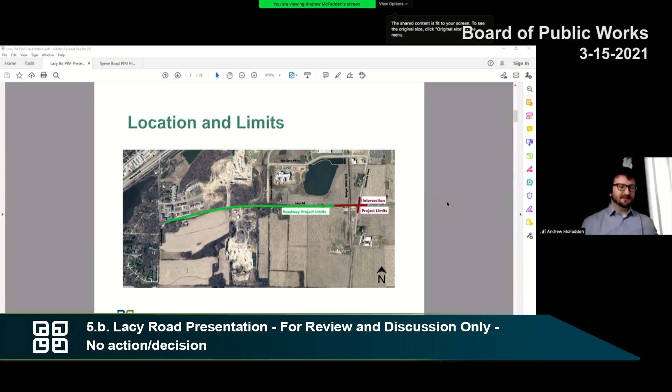Okay, but Bill, I think will jump in. I know he briefed you guys a couple weeks ago, so feel free. We'll kind of tag team this one, but I'll share my screen. I kind of did this for TTC last Thursday. This is kind of a quick run through both the Lacy project PIM and the Syene Road PIM, if I can take those jointly. So we'll do Lacy first and then Syene Road. So just kind of run through the project.

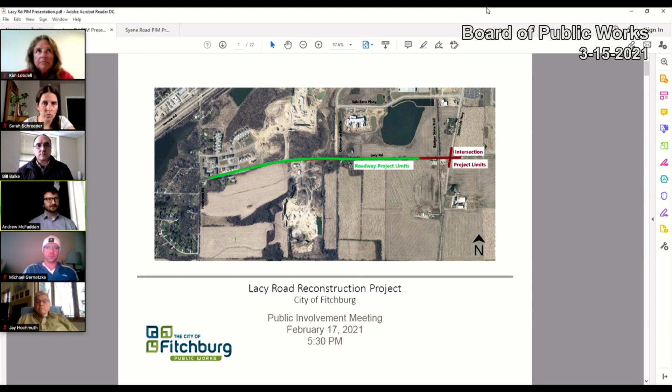As Bill mentioned, there's kind of 3 projects. The Promega frontage, in this section, so because of that, the economies of scale, they're managing the design of this roadway project that goes from roughly 300 feet east of Fitchburg Road to roughly 300 feet west of the Badger State Trail. We did not include Fitchburg Road because of the complicated right-of-way it takes that might come depending upon what that intersection looks like. And then there's an adjacent roadway project, the intersection project limits here at Seminole Highway and Lacy Road, either a roundabout or a signal is what we're looking at there.

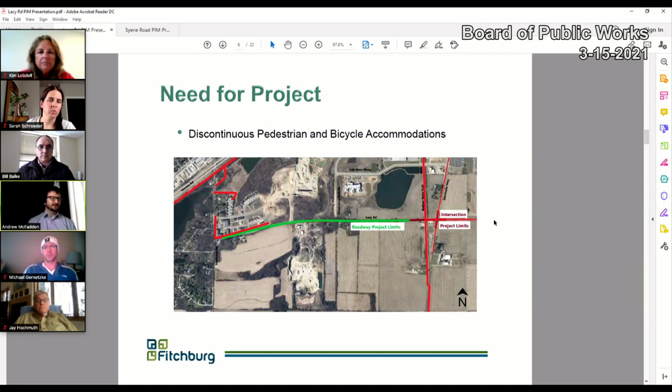So we gave this back on the 17th, and we kind of walked through the limits, the goals, the project, and overview, and then provided a public survey for folks. But I'll just get into the cross section and the actual project design.

So we have two cross sections here, one with and one without medians, depending on where you're at in the corridor. The medians offer a couple benefits: pedestrian refuge islands where there's crossings, some channelization, slower speeds, and channelization for future development by not allowing left turns into and out of different properties along Lacy Road, which can cut down conflicts and make it safer. It also helps make up some of the grades, so instead of a continuous roadway you can have a grade break and keep some of that grade differential in the median.

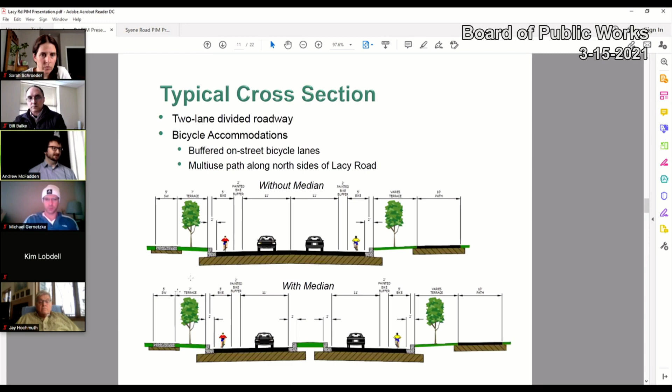So you can see here the various cross-sectional elements. We're looking west, so you have the bike path on the north side, street trees and a terrace, medians, and buffered bike lanes on both sides. The buffer is just painted markings, a 2-foot buffer between the travel lane and the associated bike lane, and then a 5-foot sidewalk on the south side. So roughly speaking, this is what we're looking at.

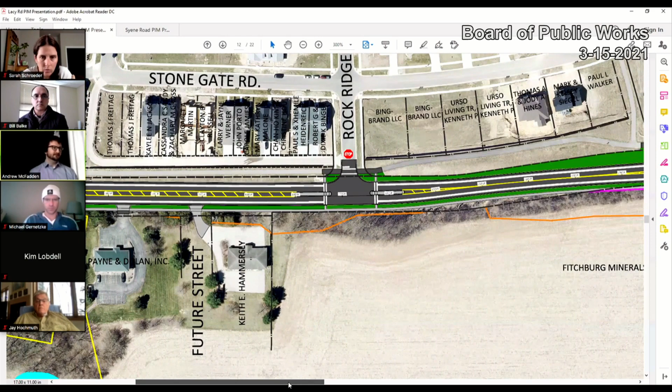So just running through the corridor - as I mentioned, Fitchburg Road is not included in this project, that'll be a 2024 project. We see our first medians here at Rock Ridge for pedestrian refuge islands. No control stopping Lacy, but we will have a side street stop for Rock Ridge as is current. You can see the buffered bike lanes, the medians here, and some driveway access changes.

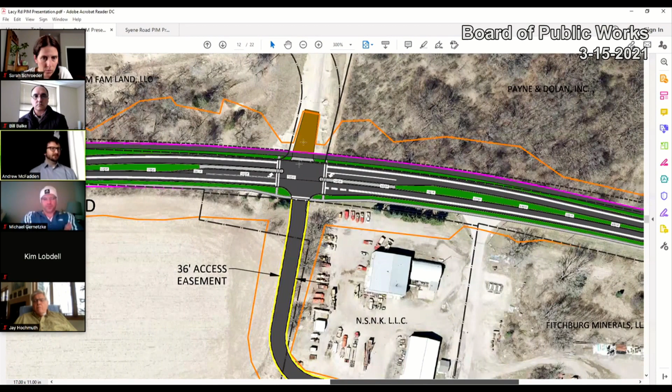A realignment here - the quarry access is a little bit farther east currently, and we'll be realigning it with the quarry access on the north side. Through this section there's a lot of existing trees and a big hill, so we're cutting that grade differential, which is why you see some of these grading limits that reach far out, just to be able to cut into that hill.

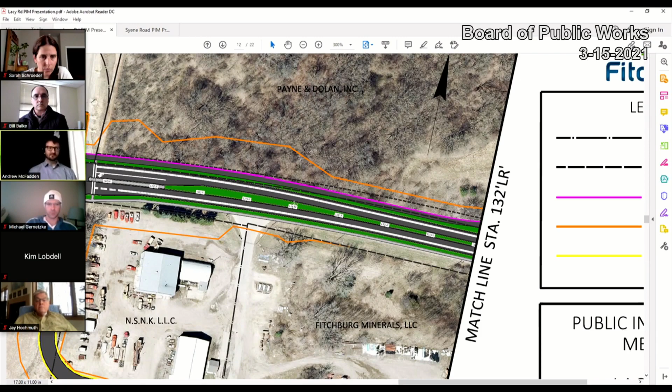We're looking at higher slopes to potentially reduce some of this grading, and I know it was brought up potentially building a wall here. That could be an option, but it's quite cost prohibitive, so we want to hold off from that if at all possible. And as I mentioned, the median does offer some grade break there, so it's not really adding to that grading. So then moving down, I'll continue going east.

I'll note that that's the first big chunk of trees as we move east that we really want to get assessed, to understand what kind of trees those are, how old they are, how many there are. We'll be taking that information into some smaller group meetings to understand what design changes we can make that would offer the biggest benefit to some of those old growth trees. So I'm happy to talk more about that.

So at Commerce Park Drive, that's not connected now. We need to change the grade, and really this is a big impetus of this project - cutting down this hill and making these horizontal and vertical curves safer. At that point we'll be able to connect Commerce Park Drive. We do have auxiliary left and right turn lanes here, so we won't be stopping through traffic on Lacy.

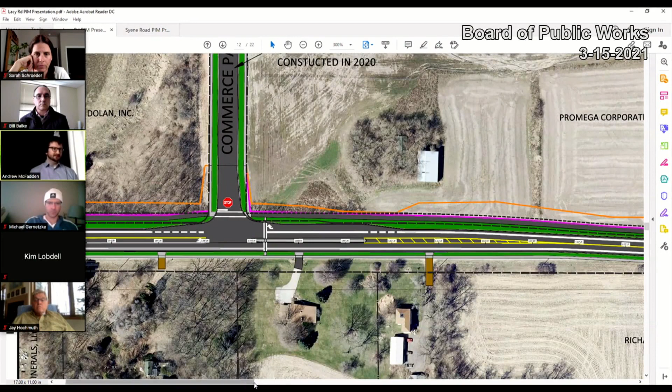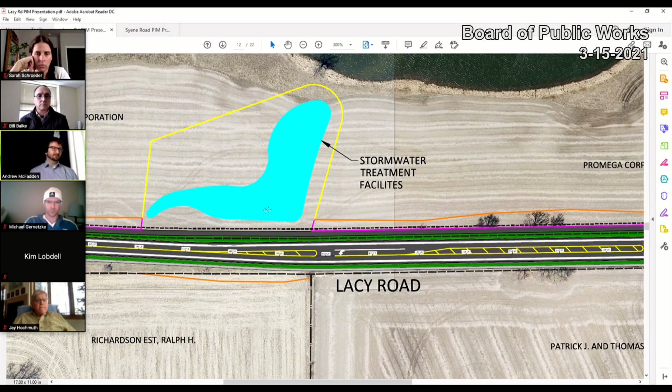We also have the median refuge island for pedestrians. And then as we get further out, you can see one of the stormwater treatment facilities. We're installing curb and gutter with this project with associated stormwater facilities, so before it gets to this kind of depression up here, we would be treating it to remove suspended solids.

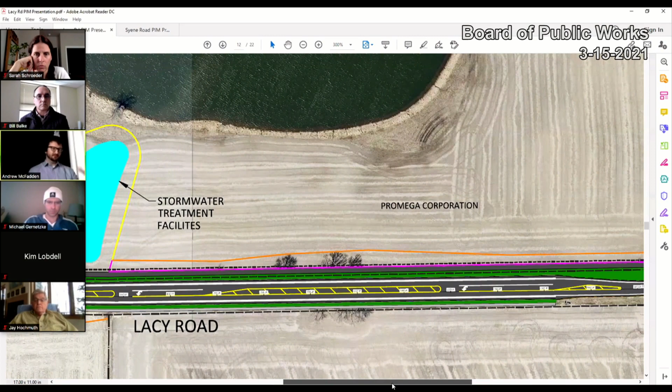Moving further east, we have two proposed left turn lanes into development south of Lacy Road. Those are still to be determined where they'll actually go and how that would look, but that's what's shown on the plans now. Then we stop right before Badger State Trail. As I mentioned, we'll have another project that comes along, improves this trail crossing, changes this control, and then merges this roadway cross section with the cross section shown here.

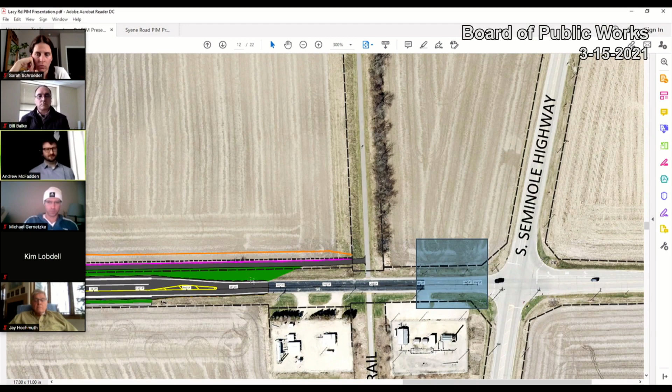So with that, I think I covered the highlights. Do you have any questions?

Before we move on, let me share next steps. We're meeting with smaller groups next, since we heard a lot of concern about different cross-sectional elements, like whether the road is too wide and what that comes at the expense of. So we asked our consultant to break down the itemized costs of all these cross-sectional elements. There are some complicating factors too. For example, if we install a median, we need 20 feet clear on each side for fire apparatus to set up their trucks. So we wanted to break some of these trade-offs down in a smaller group meeting.

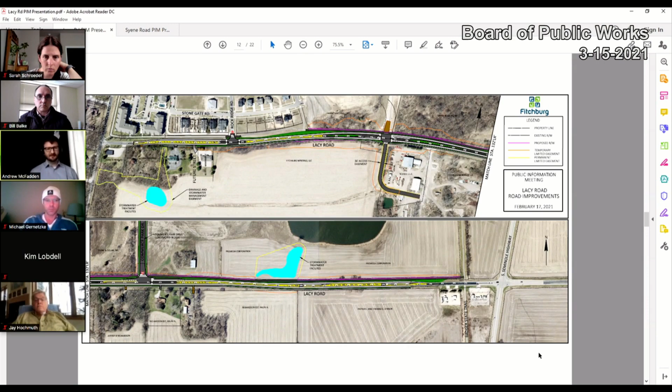We're soliciting folks on the corridor, a small group of between 4 and 8, to workshop more of this through with residents and property owners along the corridor, to understand the trade-offs, get feedback from them, and bring that back to you in about a month. That's the plan. We're also collecting more information about the trees and some other elements. With that, I want to open it up for questions.

Thank you, Andrew. We'll do this one, then take questions and hear from the board, and then go through the same process on Syene Road.

Sounds good. So first I'll open up, we have Jay Hochmuth on the phone here who I believe has some questions. So I think first maybe I will open it up to Jay and then board members.

Are you there, Jay? Yes, I am. Okay, can you hear me?

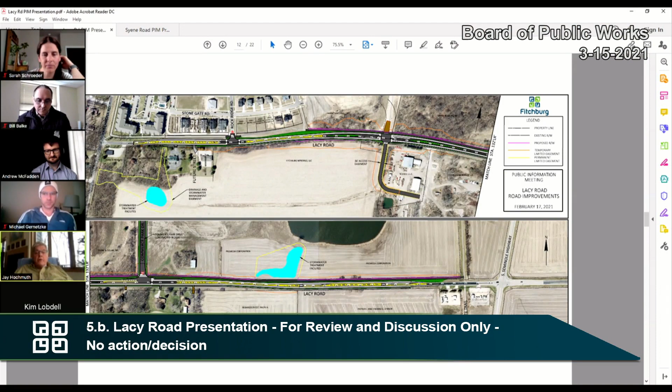I appreciate the opportunity to be here tonight with everybody, and I really appreciate what Andrew, Bill, and city staff are doing to try to answer the questions we posed as a result of the February 17th informational meeting. There's a lot of work here independent of those questions, and more work as a result of them, but we really believe this is an ideal project to solve some longstanding problems. There are safety issues on this road, no question about it. Our interest is trying to minimize the environmental footprint and save some money in the process, and that was the genesis of the questions we posed.

There have been several installments of those questions, because as we've learned more about the project we've added additional ones, and we really appreciate Andrew keeping track of this and working with others to get answers. The initial round of answers was provided last Wednesday, and we're studying those now to understand them completely, and we'll probably provide additional commentary at the appropriate time. I don't have anything else to mention tonight, and I don't have questions per se right now, but we wanted to make sure the board members were aware of this public interest in the project. I was going to email Andrew when I heard about this, but I'll say now, if there's room in this group that's studying this, I'll be more than happy to be involved. So I appreciate this opportunity to offer these general remarks, and look forward to working on this to get us to the point where we have a project to do next year.

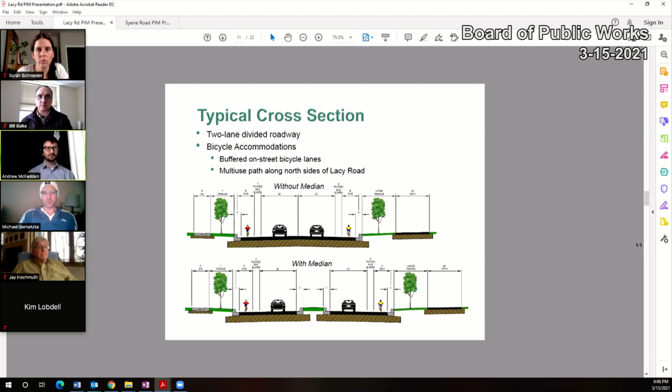And you're right, there's definitely, if you get a median large enough, you can put trees in it. In this case, we're not proposing that. So there are other benefits to where we're putting them versus, for example, the pedestrian refuge islands at the crossings, but we can definitely reevaluate how long some of these are.

I think the pedestrian refuges are great. It's just, what are they looking at for connectivity, and what's there and what's planned for.

I'm questioning what we're trying to connect. If there's future development down by Fitchburg Road, if the sidewalk is on one side and the bike path is on the other, I definitely see a need for that, up at Rock Ridge, getting down to Commerce Pike or Commerce Park. I'm not quite sure if that's one of those things where it could be planned for, or if it's just easier to do it right now and get it done with.

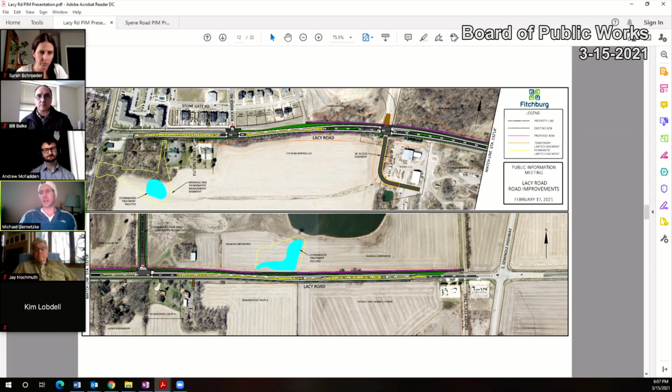And if we have pedestrians there, great. If we don't have pedestrians there, great. As a fraction of the cost to do it now versus do it at a later date, that'd be good to know as well.

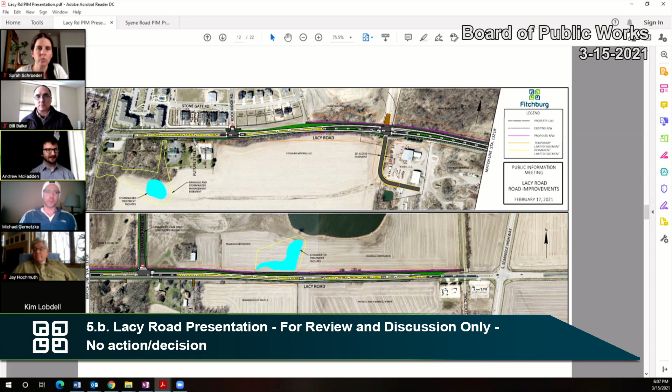Yeah, and as I mentioned, we're starting to itemize those costs. We're going to include that in the meeting summary. I haven't quite got all of those figured out yet, but we'll be getting those in there shortly.

I did want to mention, right now roughly three miles of Lacy from Syene to Seminole has on-street bike facilities. Our 2017 bike and ped plan for this type of roadway, 35 mph, less than 10,000 ADT, 2-lane, we typically look for either a parking protected bike lane, which we haven't really gotten into yet as a city, or a buffered bike lane. So that's kind of the basis of this initial project.

But yeah, it's all things that we definitely want to work through. If we don't need both, then we can certainly talk through what that looks like, and how that plays with any medians that do remain, and keeping that clear zone.

Thank you, Andrew. Sarah, would you like to go next?

Sure, I only had one question, and I apologize because I know there are several references to the TID and financial requirements for this project. I guess I still am uncertain. My assumption is that if we don't include both the bike lanes and the multi-use path, we do lose funding from the county.

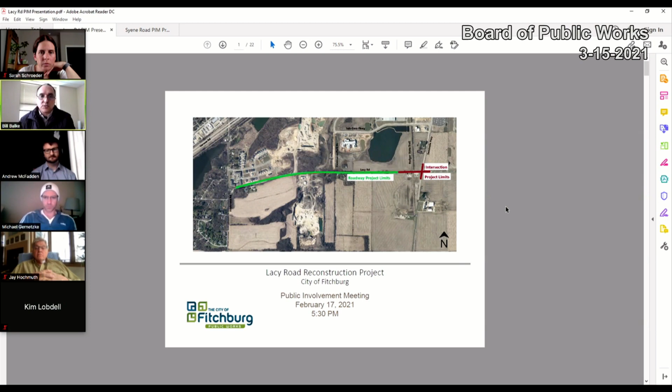So essentially where the quarry entrance is, that's where the TID boundary is. So everything from there up to Seminole Highway is included in the TID boundary. And then we're able to use that TID boundary plus a half mile, is that correct? Right, so the half mile outside of the TID is eligible to be used for project costs as well, although not at 100%.

We're saying that the improvements we're making to the road do have some benefit to areas outside of the TID, and how much of that was based on how much traffic is going to be generated going to that TID area. So what we estimated was around 15 to 25% of the new traffic generated based on the new construction in the TID would benefit those areas outside of the TID. So we did assign a portion of the cost of the construction based on those improvements.

Sarah, does that answer your question? Somewhat, it does. I'm looking at a bullet within question number 7, and I apologize for restating this, but it calls out that TID and TEA funding would not be applicable for the roadway reconstruction. Is it that a renegotiation would have to occur, so it potentially would still be applicable, but there would just need to be another conversation? Is that fair? I think so.

What we're saying is that the new development within the TID or the TEA grant area is going to need some improvements to the infrastructure. We need to improve roadways, we need to improve access to the site based on the new development within those areas. So if we were just going to resurface the roadway as is and walk away from it, that's correct - the TID and the TEA grant are based on improvements that are needed to support the new development. Otherwise, without the new development, we wouldn't need those improvements. So that's the basis of that bullet point.

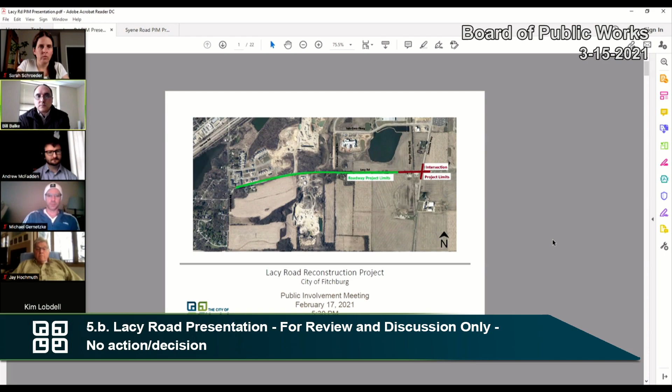Mr. Wilborn? Well, I pretty much agree with everything Mike said. And also, are we not going to line up Hammersley's driveway with the pit when this is done, so there aren't two areas close to each other with big construction vehicles coming out of?

Am I right on that? Yeah, you're talking about these two Hammersley's accesses, construction and the pit. We're going to line them up so that when trucks are coming in and out, it's all in one area as you come over.

But I don't really believe we need extra bike lanes out on the road. I think we just put a big enough bike-ped path with a stripe down the middle, and it'll be well used by pedestrians and bicyclists alike. That way they're kept off the road, so there's less chance of a kid getting hurt riding his bike out on the street.

I just don't think we need it. It's a waste of money.

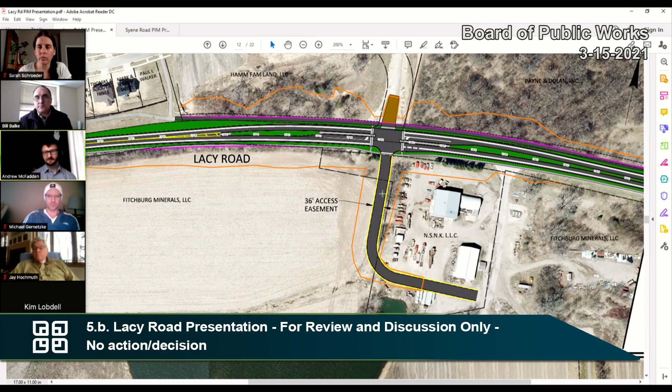O'Brien farm is supposed to come out and put their soccer fields out there, am I right? And that's why you need those couple of turns there, but I don't see it being developed beyond that for housing or anything that would bring a great deal of traffic out of there every day. Am I right or wrong?

Yeah, I believe currently this is looking like athletic fields, although nothing's been finalized at this point.

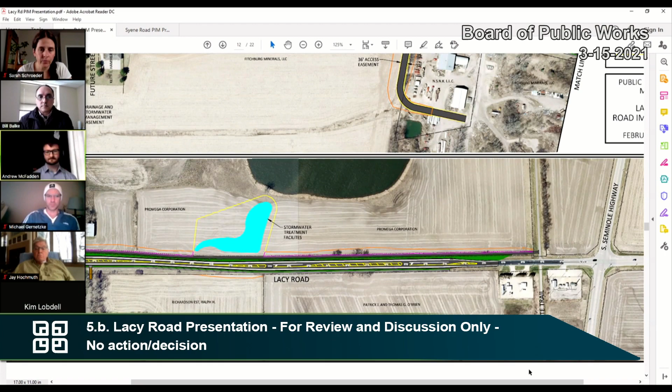Dwayne? Okay, I'll try to be brief here. The board has been listening, and I have quite a big list of emails I've received from people. Our main concern as a board, number one, I feel, is safety. Second is long-term viability of the road, and third, limiting our economic cost to taxpayers on this.

One thing I hear driving this is that the other end of Lacy Road has bike lanes. In my 28 years on the board, there are a few things I regret, but not fighting harder to keep the bike lanes off Lacy Road from Fish Hatchery to Syene is one of them. I felt it was a monumental waste of money. Mr. Wilborn, next to me, lives on there. The few bicyclists we see - I ride it maybe six times a year, usually on a weekend. I could certainly be on the path instead.

I just felt we were sold a bill of goods that we had to have that, and I'd like to remove it from our design. I realize there's a TEA grant from the state, but I think we could make a case for environmental stewardship, limiting our footprint, and I think we could make a good case for that.

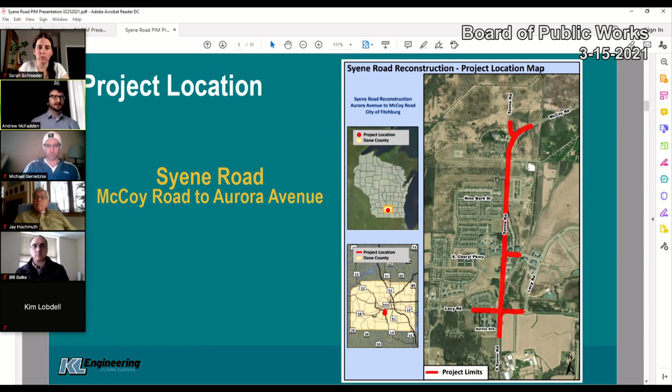We'll be looking at a traffic signal at Lacy and Syene, mainly due to railroad improvements there, and a desire from the railroad and potentially the commissioner to integrate a signal with railroad preemption there. Looking at potentially a signal or roundabout at East Cheryl, a mini roundabout potentially at Nine Bark, as well as existing options with the side street stop, and then potentially some medianization.

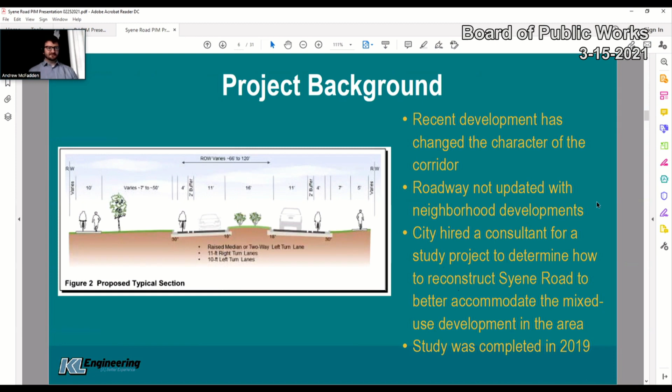So we started this 2019 study, and this primarily was a planning-level study that looked at what the general traffic was going to be, and at a high level how many lanes the road needs. This is the cross section they settled on, but we started digging in a little deeper. Again, this is the beginning of the project, but we're still trying to understand what cross-section elements folks want.

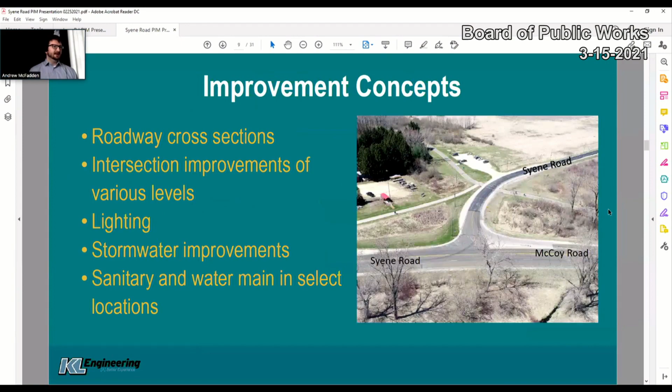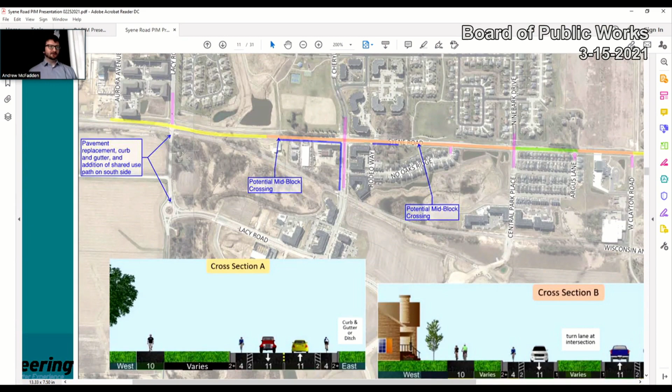You can see here we broke the corridor down into three main cross-sectional areas that we felt could fit. The first is cross-section A, in the more rural sections, or a bit further away from development. In this section, we would potentially forego the median and the sidewalk on the east side, just as it narrows into the railroad right of way.

And potentially do the same thing for the north. Again, there's not really any connections adjacent to the wetlands, and there's an existing bike path, or multi-use path, on the west side. So we thought we would forego the medianization and the width and the sidewalk there.

And then in cross-section B, the most of the rest of the corridor, we would have a variable median, 10 to 16 feet, with the bike path on the west side. You can see here we'd have on-street bike lanes and a sidewalk on the east side. The sidewalk is primarily built already, except for a couple of residences on the corridor. So in cross-section B, most of that stays the same - we're talking about median and buffered bike lanes, really, as an addition.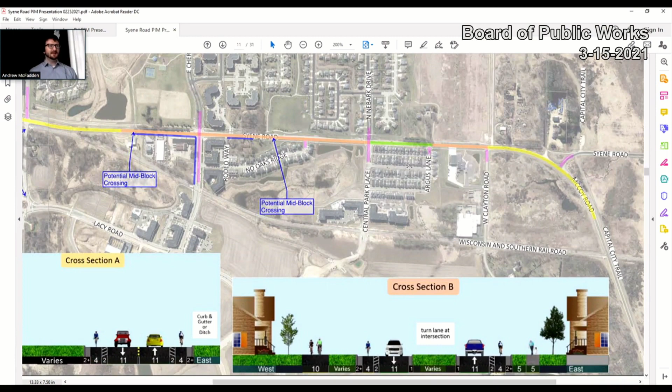Cross-section C is the trickiest spot where we have the tightest right-of-way. There, we proposed three alternatives during the meeting, and I unfortunately didn't know enough at the time to definitively say we wouldn't be buying up right of way at the historic property. Now I can at least more confidently say none of our cross sections have any right-of-way takes at the historic property - if you're familiar with that, that's the McCoy House.

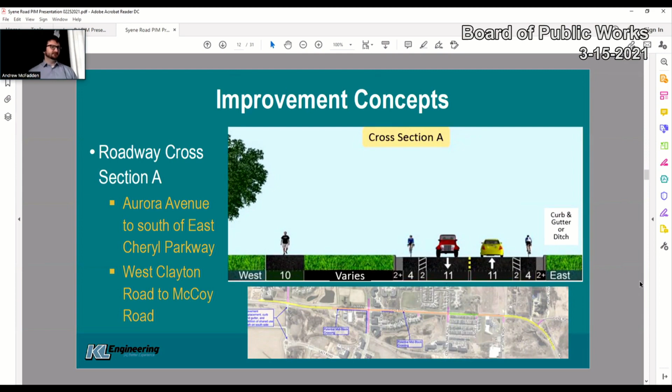We'll be meeting with the residents later this week, talking through some options and what their concerns are, and then we'll be meeting with some folks from Upland across the street here later to talk about what their concerns are. So here's one of the options - this is A. Here are the three options in that tight section block of the corridor, with housing fronting Syene on one side and the historic property on the other.

All these options have some form of parking, but I want to note this doesn't have to be the whole length of the block. We have existing utilities we need to keep there, and in the developer agreement there were trees designated for each house. So depending on what people want, we can be flexible and reach a compromise - it wouldn't necessarily be one monolithic cross section for the whole block. We're going to work through this more with those residents, and also do something similar to what we're doing with West Lacy - broadening it and having representation from all the neighborhoods in a larger group to talk about other elements along the corridor.

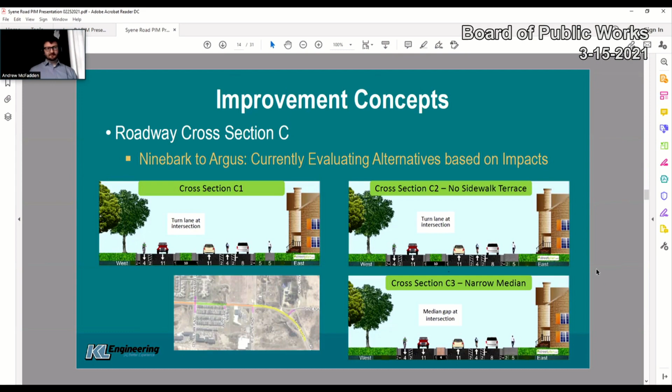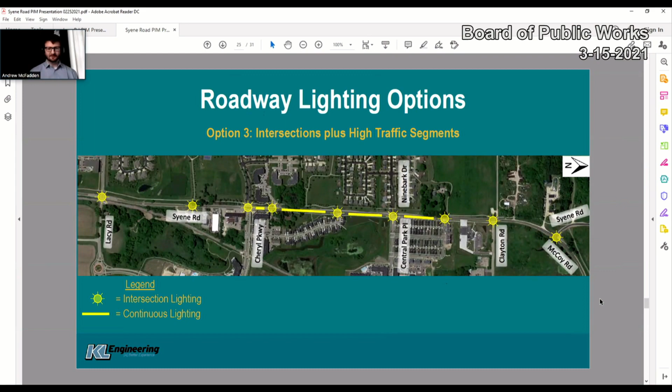We're talking about control at these intersections, their signal, roundabout. We're also talking about lighting options, so potentially lighting the whole corridor versus just the intersections, versus maybe a compromise in between those. This is much sooner on in the process than Lacy, so we're getting these design teams going, these advisory groups, to workshop through more of these options.

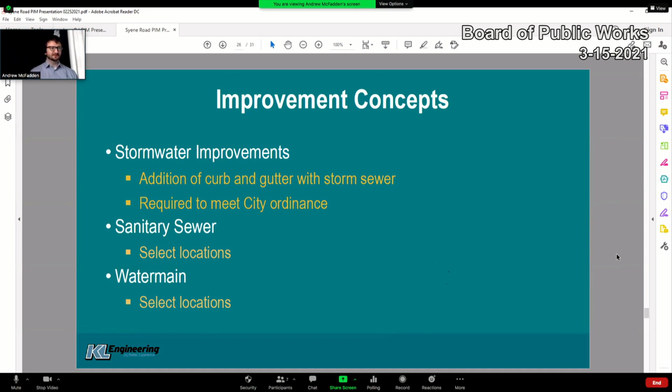You can also see definitely some sanitary sewer, water main in select locations, and curb and gutter and stormwater improvements. That's kind of the real impetus of this project. So with that, I want to open it up for questions.

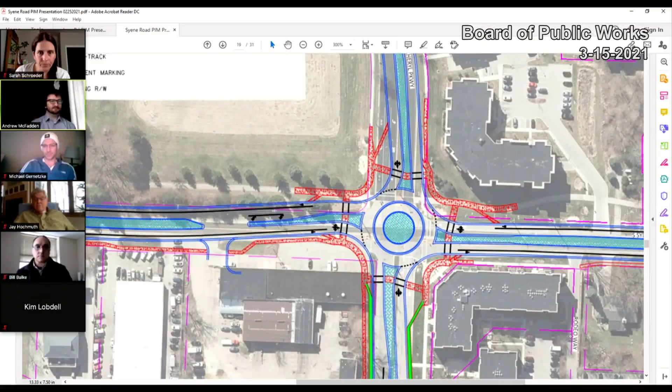It is tight, you can kind of see it here. It's a preliminary layout - the consultants took this one a little bit farther knowing the QuickTrip is going in this corner, so they worked on it ahead of the other intersections. We have both proposed, and looking at the comments so far, it's basically a 50-50 split. We solicited a survey for both of these projects, not to get a vote since it's not very representative, but to get some of the pros and cons.

I bolded some things I felt were important. A lot of folks mentioned: is a roundabout going to be tricky with QuickTrip being there and bike-ped traffic? But other folks mentioned they didn't want the lights, the illumination of the roadway, or the queuing associated with a traffic signal. When we come back to you later with some of these control features, we're gonna run through that pro-con list developed both by our engineers and by residents based on their lived experience of the corridor. It's a great point - I'm not sure which one would work best. Both signal and roundabout fit here, so we'll see.

Anything else, Dave? Hopefully that helps. I'll try to be short again. I've received several emails, one from - I'll just say her first name, Elizabeth - who lives on South Syene Road, and she wanted to see traffic lights at those intersections north of Lacy and Syene. She felt a lot of people are avoiding roundabouts because they don't feel comfortable in them, and her preference was for having lights up there. I wanted to get her viewpoint. I'm not providing her name or phone number - I do have it and would be glad to give it to the city, but I don't want it in the public record right now.

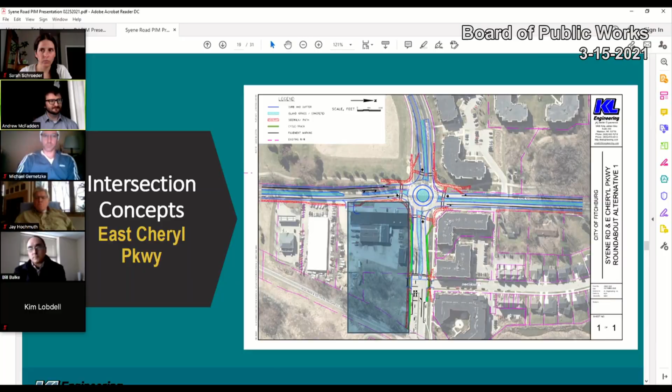So it's turned, but the southeast corner of East Cheryl and Syene, they'll be going kind of this whole stretch from the railroad to South Syene. That's not the exact limits, but that whole stretch of East Cheryl. So they're tearing down some existing buildings to build a Quick Trip. I just didn't know for sure where it was going.